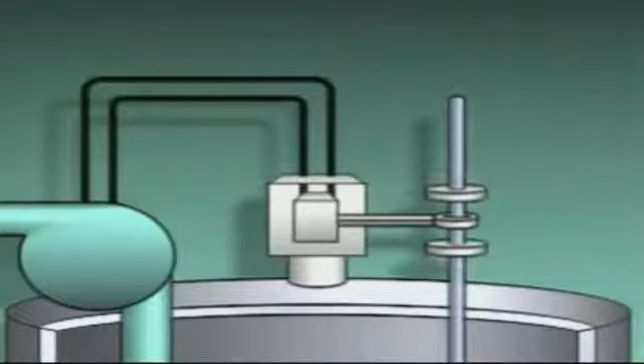The dead zone can be reduced by moving the two collars closer together. A smaller change in level will then turn the pump on or off. But even though the water will be maintained at a more constant level, the pump will turn on and off more frequently. And this overuse could damage the system's components.

With proportional control, a controller's output signal is proportional to its input signal. In other words, if the input to a proportional controller changes by a given amount, the controller's output will also change by a given amount. To explain proportional control, we'll use this illustration of an automatic level control system.

We'll say that a temporary disturbance decreases the demand for water from the tank and causes the water's level to briefly surge above its set point. As the water rises, a level sensing float converts the change in level to mechanical motion. The motion is detected by a measuring element or transmitter and converted to a pneumatic signal representing the value of the higher water level. This signal is sent to the controlling element or controller.

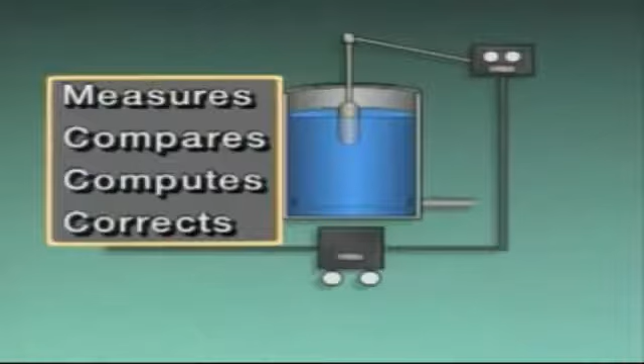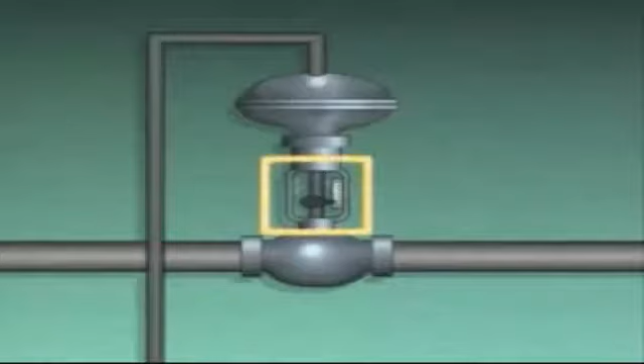The controller measures the signal, compares the signal to set point, computes the difference between the two values, and produces a corrective output signal that's proportional to the input signal. The controller sends that signal to the final control element in the system, a control valve. The control valve responds by closing down to decrease the flow of water to the tank.

However, because of process characteristics such as resistance, capacitance, and dead time, the level fluctuates before it finally returns to set point. We can tell more about how the temporary change in water level affected the system if we plot the control signals on a graph.

On the graph, the scale on the far left is marked off in feet to indicate the water level in the tank. The next scale indicates the value of the input signal to the controller in pounds per square inch, or PSI. The scale on the right indicates the value of the output signal from the controller. It too is in pounds per square inch.

The dashed horizontal line represents the set point for the water level. In this example, the set point is 3 feet, which is equivalent to a 9 psi input signal to the controller and a 9 psi output signal from the controller. In this case, it increased to 13 psi. The output signal caused the control valve to close, decreasing the supply of water to the tank.

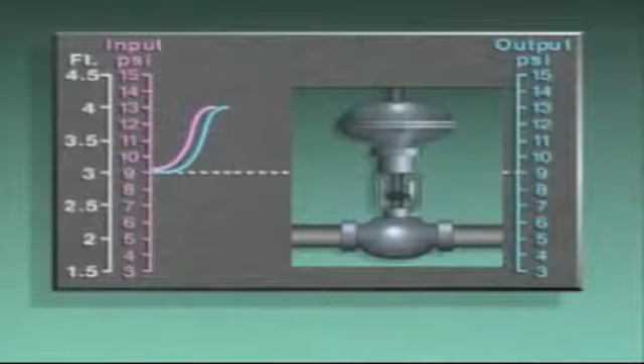As the level in the tank fell, the input and output signals decreased accordingly. However, the process characteristics that we mentioned caused the signals to go through several fluctuations or cycles before returning to set point. With a temporary disturbance, process conditions return to their original state. So a proportional control system can normally return the controlled variable to set point. But

if a continual disturbance occurs, a proportional controller may not be able to restore original conditions. For example, this graph shows the input and output signals when an ongoing decrease in demand caused the level in the tank to rise. In this example, the control system brought the process back under control. But when it did, the level stayed higher than the original set point.

That's because the input signal to the controller increased, then stayed high because of the continual disturbance. As a result, the proportional output signal stayed high as well. The higher steady state value that resulted, that is, the higher level that's represented by the input signal, is called the control point. The difference between the variable's control point and its original set point is called offset.

Offset occurs because a proportional controller produces only enough output to bring a process back under control during a continual disturbance. It may not produce enough output to overcome the disturbance and return the process variable to its original set point.

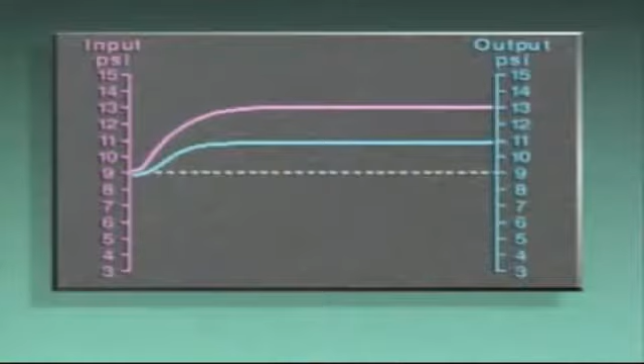Now, the signals on this graph show a proportional band that's greater than 100%. This type of proportional band is called a wide proportional band. With a wide proportional band, a large change in input to the controller produces a smaller change in output. The proportional band for this example is 200%. Since the output signal changes less than the input signal, a wide proportional band can minimize the amount of cycling in a system. However, there's more offset with a wide proportional band.

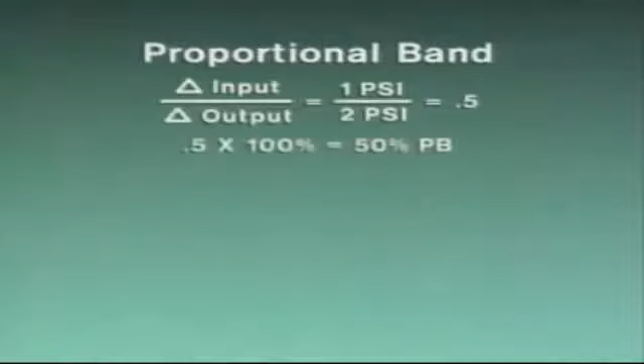Some manufacturers use the term gain when describing a proportional control adjustment. Gain is the inverse of proportional band, and it's expressed as a quantity rather than as a percent value. For example, a 1 psi change in input that produces a 2 psi change in output represents a 50% proportional band. But since gain is the inverse of proportional band, the relationship between the change in input and output is reversed. So the gain in this example is 2.

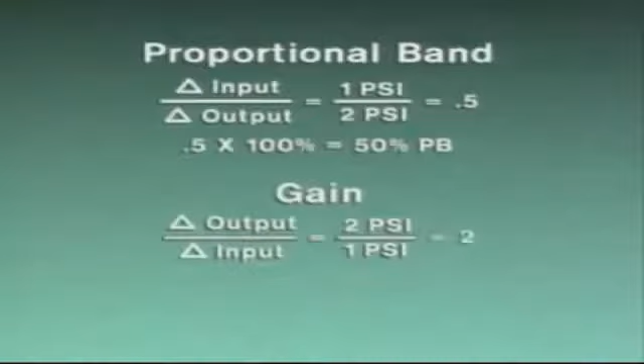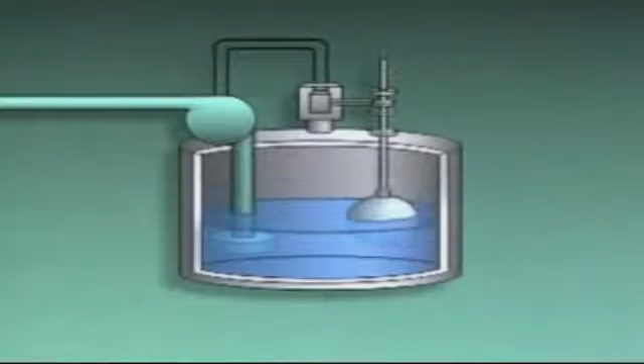Not all control modes can return a controlled variable to set point after a process disturbance. However, reset control is designed to adjust the output of a proportional controller to help eliminate offset and restore original process conditions. Reset action responds to a controlled variable's deviation from set point by increasing or repeating the amount of proportional control until the variable returns to set point.

Reset control doesn't exist without proportional control. In fact, it's actually proportional plus reset control, since it adds an additional corrective action to the proportional action. Also, reset control is sometimes called proportional plus integral, or PI control, because it's based on a mathematical function called integration. In any case, it's easier to understand how reset control works by looking at an example.

In this arrangement, an automatic control system is used to maintain the level of water in a tank. The input signal from the transmitter to the controller represents the level of water. The output from the controller adjusts a control valve in the supply line to the tank. If a continual disturbance causes a decrease in the flow of water from the tank, the level in the tank rises, and the input signal to the controller changes to reflect the higher level.

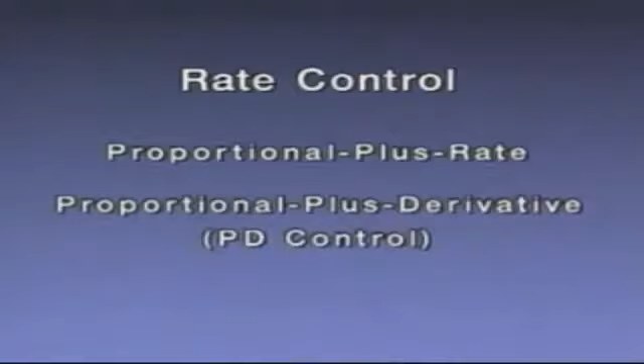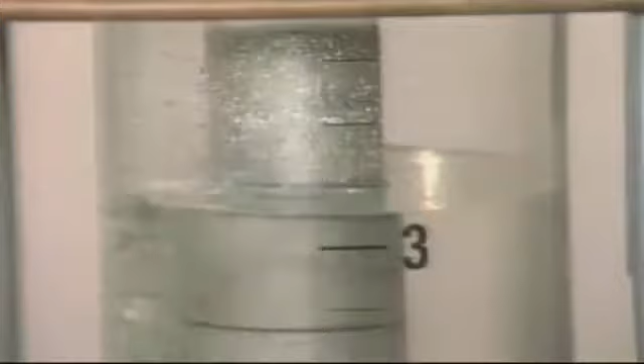In any case, when a process disturbance causes the input signal to a rate controller to change, the controller measures the speed or rate at which the input is changing and produces an instant boost to the proportional output signal. In effect, this action tries to stop changes in the input as soon as they're detected. To get a better understanding of rate control, we'll use this automatic level control system in which rate control has been added to a proportional controller.

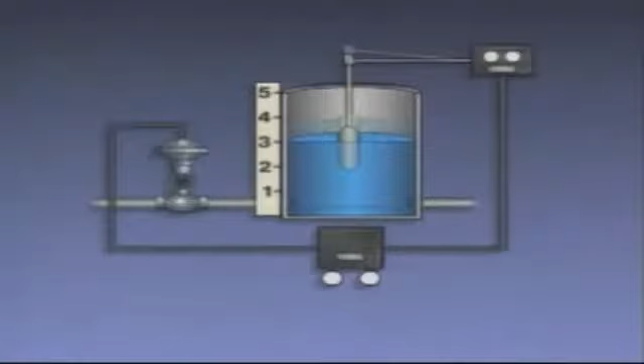However, because rate control responds only during changes in the input, and because proportional control only provides a proportional output, there may be some offset in the process variable. In other words, as long as the level is at steady state, even with offset, the rate controller will not provide a correcting output. When a process requires a rapid control action that eliminates offset, a control mode known as proportional plus reset plus rate control may be used.

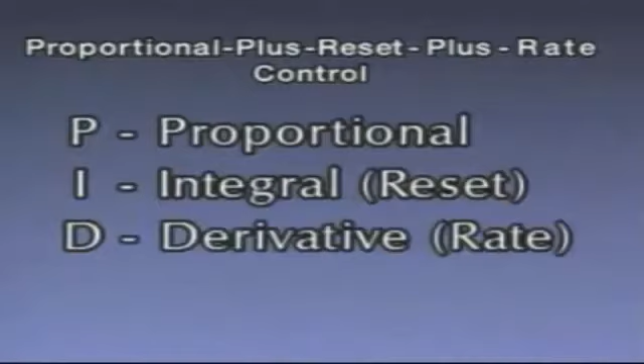It combines the precise response action of reset control with the fast response action of rate control. Proportional plus reset plus rate control is sometimes called PID control. P for proportional, I for integral, which is the same as reset, and D for derivative, which is the same as rate. One example of a process that requires PID control is the gas-fired oil heating furnace represented here.

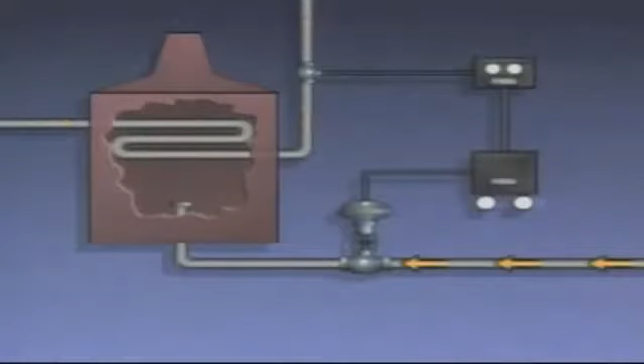During operation, oil flows through a pipe in the furnace combustion chamber. Gas flows through a valve in another pipe to a burner. As the gas burns, part of the heat that's produced is transferred through the pipe to the oil. The controlled variable is the temperature of the oil leaving the furnace. A sensing device in the oil pipe provides oil temperature readings to a temperature transmitter. The transmitter measures the temperature and provides a corresponding pneumatic signal to a controller. The controller uses that information to produce an output signal, which adjusts the control valve to regulate the furnace flame.

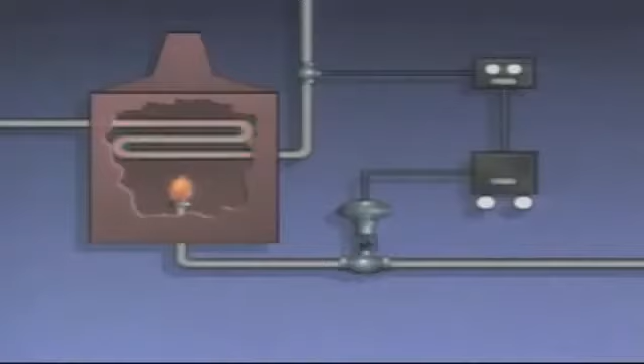Soon, the combination of reset and rate control returned the oil temperature to steady state at its original set point. The final output signal also returned to steady state, but at a higher value. The higher output closed the control valve to a new setting to maintain the oil temperature at set point. In this topic, we described how reset control, rate control, and a combination of the two work in an automatic control system. Now let's try some practice questions.